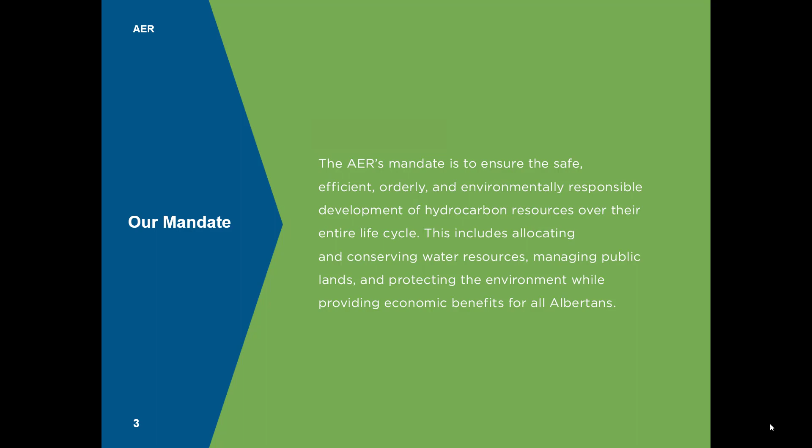The Alberta Energy Regulator is the regulator for hydrocarbon resources in Alberta. Our mandate is to ensure the safe, efficient, orderly, and environmentally responsible development of hydrocarbon resources over their entire life cycle. In Canada, methane emissions come from various industries. The largest source of emissions is the oil and gas sector, with the vast majority of activity occurring in the provinces of Alberta, Saskatchewan, and Newfoundland and Labrador. Approximately 70% of Alberta's methane emissions in 2014 were from the oil and gas sector.

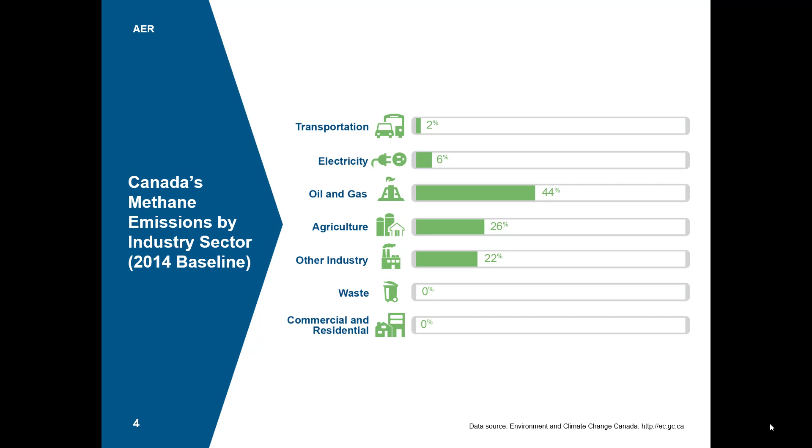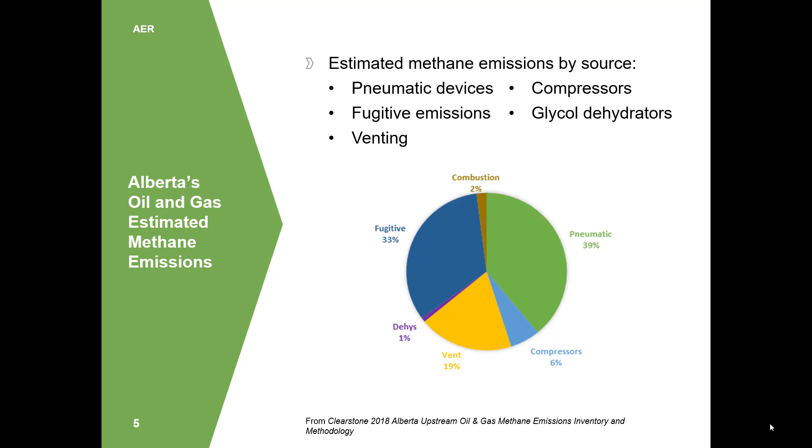Estimates indicate that the largest sources of emissions from oil and gas operations in Alberta are pneumatic devices, fugitive emissions, and general venting. Unless otherwise specified, the requirements apply to upstream oil, gas, and bitumen wells, and facilities, gas plants, pipeline installations, waste storage facilities, and tank terminals that are regulated by the AER. This includes production and injection wells, central processing facilities, fractionation, and straddle plants.

The proposed requirements do not apply to oil sands mining schemes, transmission facilities, meter stations and pipelines, or oil sands plants, including upgraders for removing bitumen from the oil sands mines, refineries, railcar loading facilities, downstream distribution facilities, and the AER-regulated facilities that are not related to oil and gas or bitumen production, such as coal water wells, brine wells, or Canadian Energy Regulator regulated facilities.

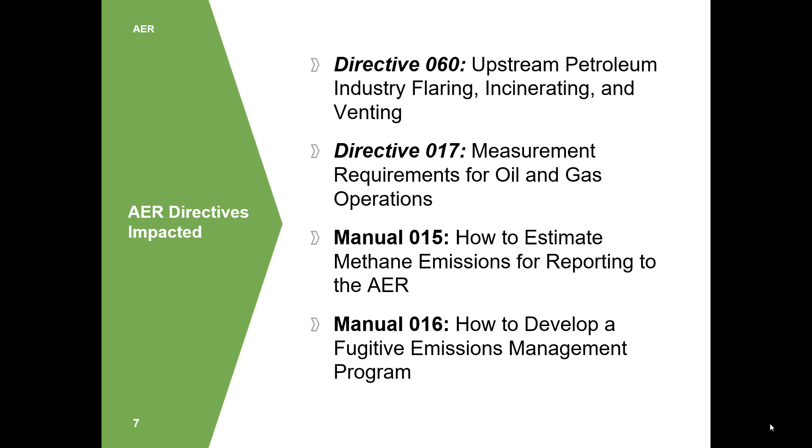These are the AER directives impacted. Directive 60, which pertains to operations, reporting, record keeping, and emissions requirements, as well as Directive 17, which pertains to measurement and reporting requirements. Two new manuals are also available: Manual 15, how to estimate methane emissions reporting to the AER, and Manual 16, how to develop a fugitive emissions management program.

Regulatory enhancements within Directive 60. The definitions of fuel and flare and vent gas have changed for reporting purposes. Most notably, gases previously defined as fuel gas have been narrowed to only include gas that is combusted, and the released energy is used in upstream oil and gas operations. Any gas sent to flare is deemed flare gas, and any uncombusted gas that vents to the atmosphere is vent gas. Flaring and incineration spacing requirements now include new spacing requirements for enclosed combustors. There is also an increase in flaring limits for small gas plants.

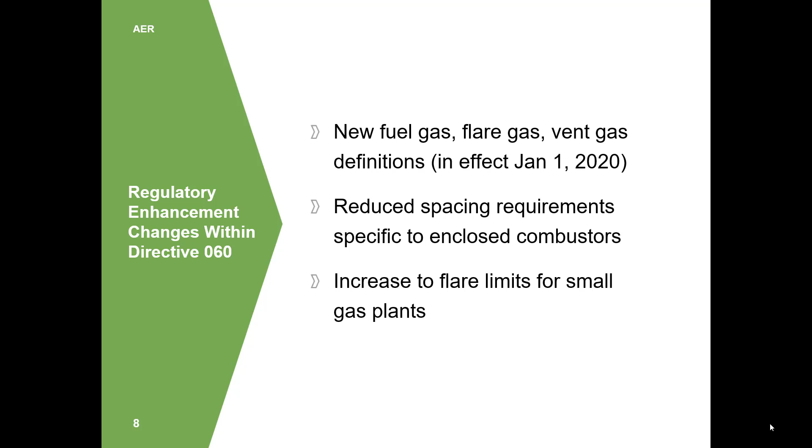This Venn diagram illustrates the layers of regulatory requirements. The requirements limit vent gas through an overall vent gas limit, a defined vent gas limit, fleet average limits, and equipment-specific vent gas limits. For example, pneumatic devices have equipment-specific requirements and are also governed by the overall vent gas limit. Additional requirements address fugitive emissions management, as well as measurement, reporting, and record keeping.

Overall vent gas refers to routine and non-routine vent gas. The duty holder must limit overall vent gas at a site to 15,000 cubic meters or 9,000 kilograms of methane per month. The cumulative vent gas from all sources at a site must not exceed the overall vent gas limit.

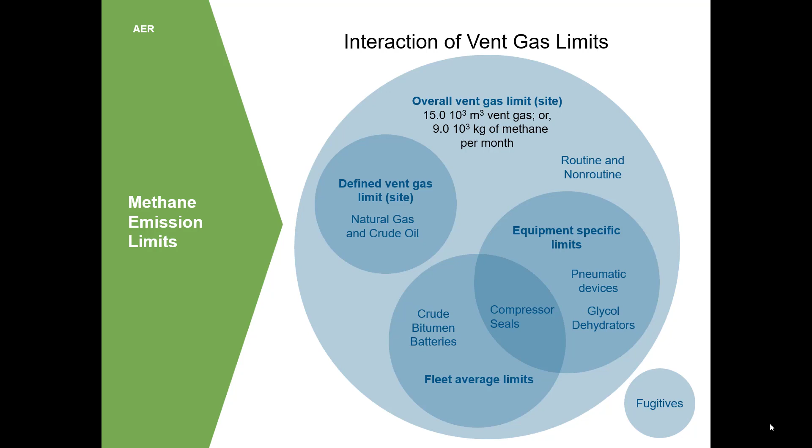In effect dates for the requirements. On January 1st, 2020, the changes to the fuel, flare, and vent gas definitions went into effect and changed how volumes are reported in Petrinex. Also new for 2020, compressor seal testing begins, methane emission records must be kept, and the first annual methane report is due. A methane reduction retrofit compliance plan, as well as a fugitive emissions management program must be in place.

In 2022, crude bitumen battery venting and compressor seals may be managed under a fleet average, and new facility and equipment requirements come into effect, as well as venting limits for existing glycol dehydrators. In 2023, existing pneumatic requirements come into effect, and the overall vent gas limit applies to all sources of vent gas at a site. Unless otherwise stated, all other requirements of Directive 60 are in effect January 1st, 2020.

The Methane Reduction Retrofit Compliance Plan. Duty holders are required to develop a Methane Reduction Retrofit Compliance Plan, or MRRCP, that outlines the actions that will be taken before 2023 to ensure that all sites will come into compliance. In the MRRCP, operators must identify the resources allocated to completing the replacements and retrofits and the schedule for the actions. An executive must approve the plan.

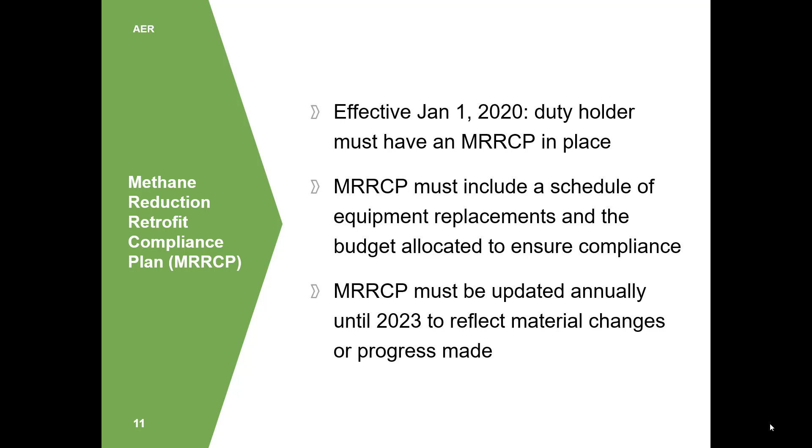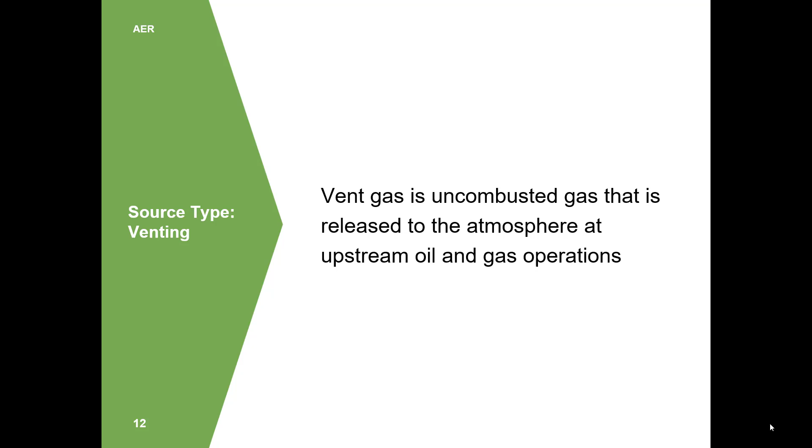Venting. Venting represents 20% of Alberta's methane emissions from the oil and gas sector. This 20% does not include emissions from pneumatic devices, compressors, or dehydrators. Vent gas is uncombusted gas that is intentionally released to the atmosphere at upstream oil and gas operations.

Vent gas limit for defined vent gas. Defined vent gas refers to vent gas emitted from routine venting, excluding vent gas from pneumatic devices, compressor seals, and glycol dehydrators. Non-routine venting is managed under the overall vent gas limit.

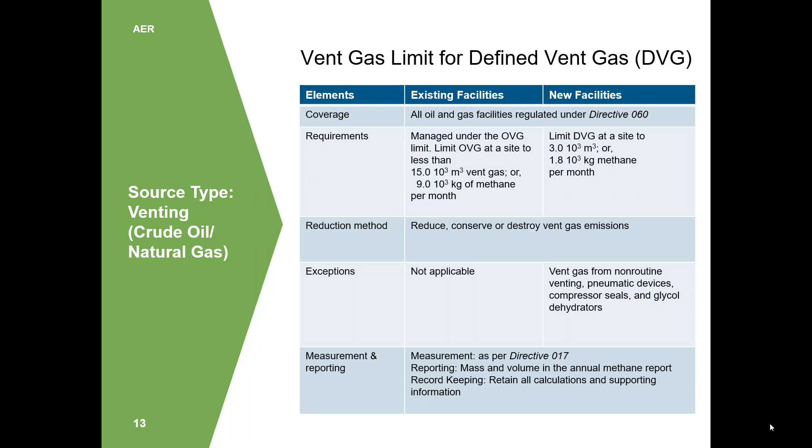The duty holder must limit defined vent gas at a site to 3,000 meters cubed per month, or 1.8 tons of methane per month, at any site with first receipt or production on or after January 1st, 2022. Operators must report the volume and mass of defined vent gas in the annual methane emissions report.

Vent gas limits for crude bitumen batteries. The duty holder must limit vent gas from crude bitumen batteries by either managing vent gas at crude bitumen batteries to meet the defined vent gas limit at each site, or adhere to a crude bitumen fleet average. The crude bitumen fleet average limit is applied each month per facility ID from all crude bitumen batteries in a duty holder's fleet, with no site to exceed the overall vent gas limit.

Thermal in situ schemes and operations are excluded from the crude bitumen fleet average. Also, batteries with either crude oil wells or crude bitumen wells inside the Peace River area, as defined in Directive 84, are excluded from the fleet average limits for crude bitumen batteries. Semi-annual gas-oil ratio, or GOR, testing is required for crude bitumen batteries managed under the fleet average.

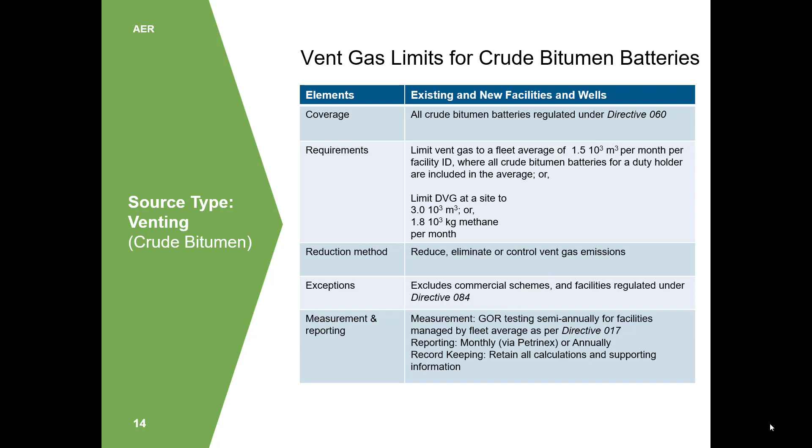Pneumatic devices. Pneumatic devices include pneumatic instruments and pumps that are the largest contributor of approximately 36% of Alberta's oil and gas methane emissions. Pneumatic instruments include devices such as controllers and transducers that use pressurized gas to maintain process conditions. Pneumatic pumps use pressurized gas to inject chemicals, usually to prevent freezing or corrosion.

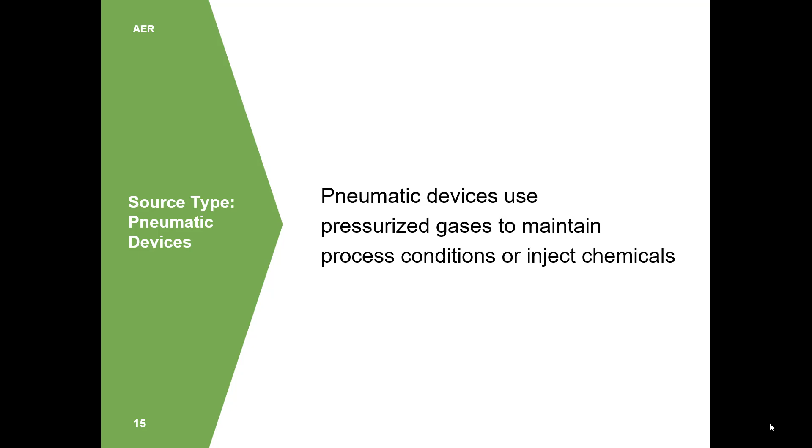Vent gas limits for pneumatic devices. Pneumatic instruments and pumps installed on or after January 1st, 2022 must control vent gas. Exceptions include instruments that are required to maintain safe operating conditions or to achieve a necessary response time, and there is no other way of accomplishing this while still meeting venting requirements. Pneumatic pumps that are operating less than 750 hours per year are also exempt from these requirements. These new devices that are permitted to vent require a weatherproof tag.

Level controllers installed before January 1st, 2022 must reduce venting by either using a relay that minimizes transient or dynamic venting, or by adjusting the actuation frequency to reduce unnecessary actuations. Instruments other than level controllers that are installed before January 1st, 2022 must be retrofit or modified so that the manufacturer specified steady state vent gas rate is less than 0.17 meters cubed per hour.

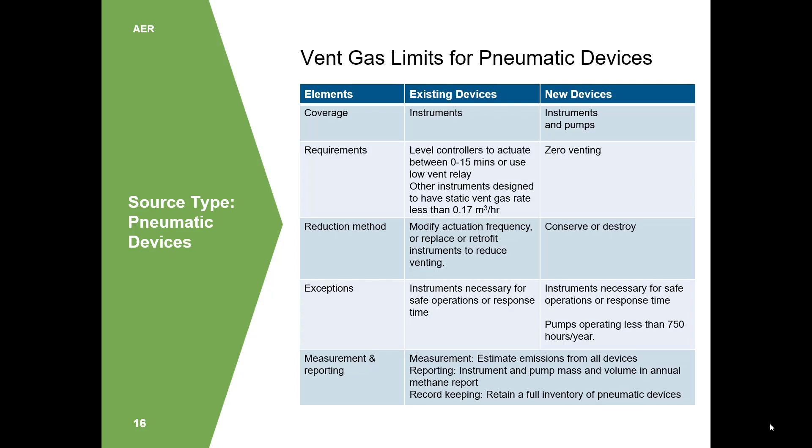Operators must report the vent volumes and mass from pneumatic instruments and pumps in the annual methane emissions report. Operators must maintain an inventory of pneumatic devices on record. Compressors. Compressors represent 8% of Alberta's methane emissions from the oil and gas sector. This 8% includes compressor seal vents, blowdowns, and engine starts.

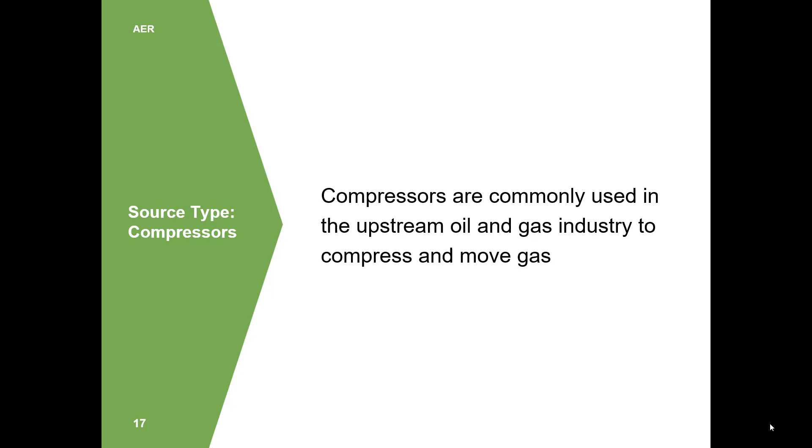Vent gas limits for compressor seals. The vent gas limits for compressor seals apply to any reciprocating and centrifugal compressor rated to 75 kilowatts or more that operates for 450 hours or more per calendar year. Compressor starts and blowdowns are exempt from this requirement and form part of the overall vent gas limit.

For reciprocating compressors, the requirements apply an annual fleet average rate limit to reciprocating compressors that are installed before January 2022. The fleet average rate limit will also apply to reciprocating compressors that are installed on or after January 1st, 2022 that have fewer than 4 throws. An upper rate limit per throw will also be applied on all reciprocating compressors subject to the fleet average limit. Duty holders must ensure their fleets meet the average rate limit by January 1st, 2022.

The duty holder must control vent gas from any reciprocating compressor with 4 or more throws installed on or after January 1st, 2022. For centrifugal compressors, duty holders are subject to a per compressor vent rate limit. If a duty holder discovers that the per compressor vent rate is found to exceed the vent rate limit, the duty holder has 90 days to bring the vent rate below the limit. For compressor seal measurements and reporting requirements, duty holders will have an annual compressor seal vent metering requirement and report the annual volume and mass by facility, as well as information specific to each compressor.

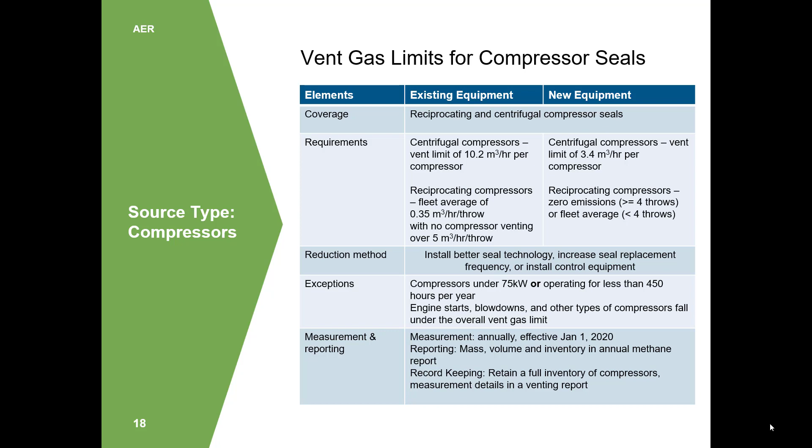Glycol dehydrators. Glycol dehydrators represent approximately 3% of Alberta's methane emissions from the oil and gas sector. This 3% includes emissions from regeneration units, flash tanks, and energy exchange pumps. Glycol dehydrators are used to remove water from gas.

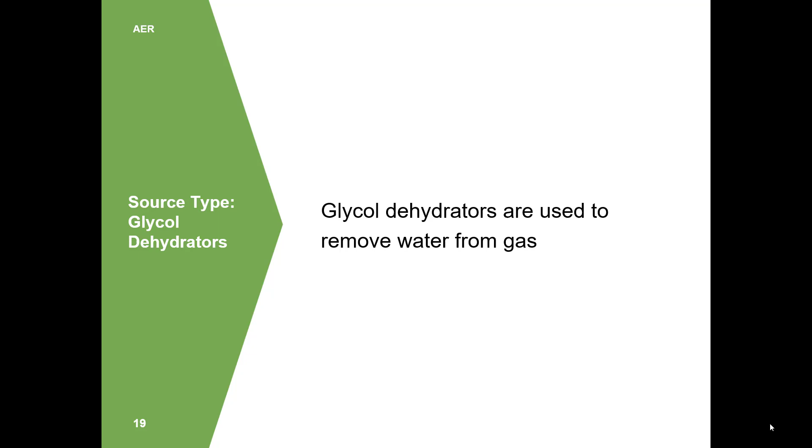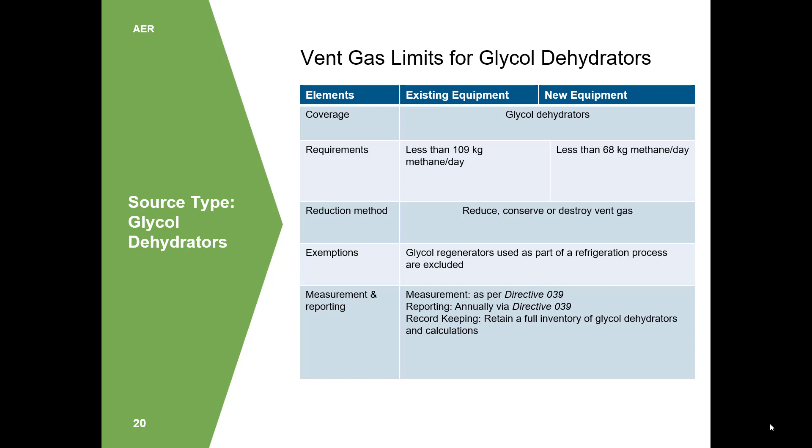The requirements apply a limit of 109 kilograms of methane per day for each dehydrator installed before January 1st, 2022, and a glycol dehydrator rate limit of 68 kilograms of methane per day for glycol dehydrators installed on or after January 1st, 2022. Please refer to Directive 39 for measurement, reporting, and inventory requirements for glycol dehydrators.

Fugitive emissions. Fugitive emissions are unintended releases of gas to the atmosphere and include emissions from worn, broken, or loose components, surface casing vent flows, gas migration, and equipment emitting in excess of design or normal operating conditions. Fugitive emissions contribute approximately 30% of the estimated 33.3 megatons of carbon dioxide equivalent associated with oil and gas operations.

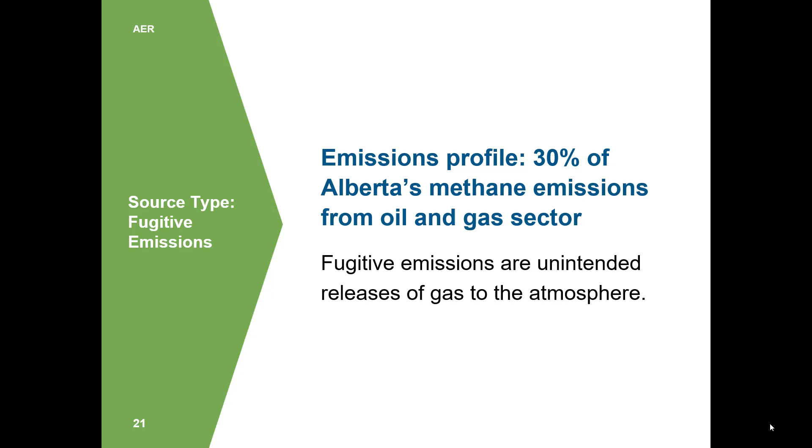Fugitive emissions management. Survey frequency and repair requirements are based on the concept of risk-based regulatory design. Not all facilities, equipment types, or fugitive emissions require the same level of effort or response. Fugitive emissions survey frequency is triannually for sweet gas plants, sweet compressor stations, and sites with controlled storage tanks.

The survey frequency is annually for sour gas plants, sour compressor stations, batteries, terminals, custom treating facilities, and injection or disposal facilities. Fugitive emission screenings are required annually at well sites. Surveys are required starting January 1st, 2020. Once a fugitive emission is identified, operators will have between 24 hours and 30 days to repair. Repair may be postponed for quantified fugitive emissions under 10,000 parts per million and fugitive emissions that require a major shutdown to repair.

Alternative detection technologies may be used to complete surveys and screenings. Justification must be provided to the AER upon request. Alternative program design proposals may be submitted to the AER for evaluation and possible approval to be used instead of the stated requirements.

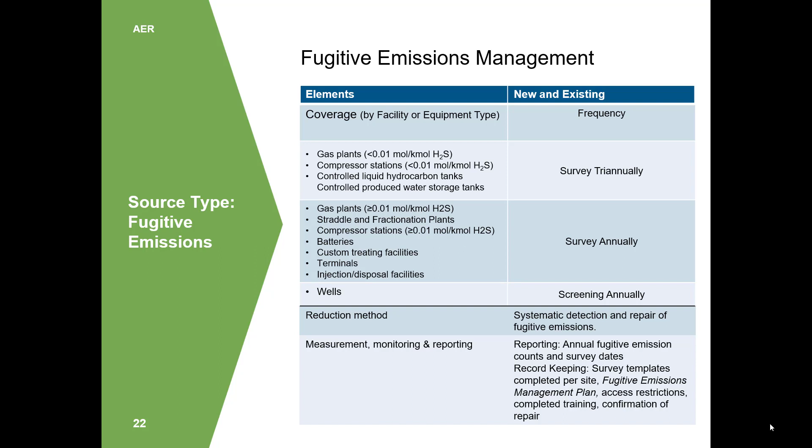Fugitive Emissions Management Program. The AER requires that each company develop a fugitive emissions management program. The mandatory elements that must be in a duty holder's fugitive emissions management program are detailed in Appendix 12 and include such things as plans to meet the requirements, procedures regarding training, data management, and continuous improvements, as well as equipment that will be used to conduct surveys. The AER encourages operators to introduce or enhance preventative maintenance practices and ongoing fugitive emissions detection measures to reduce the likelihood of fugitive emissions.

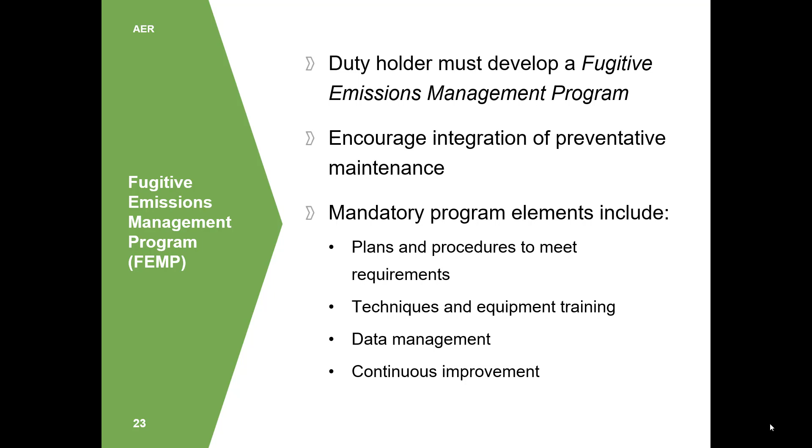Emissions reporting and compliance assurance. Methane emissions reporting. Methane emissions reporting is needed to support the outcomes of the Climate Leadership Plan. This includes tracking progress made towards the 45% reduction outcome in 2025, providing compliance assurance oversight, generating performance reports for government and all stakeholders, and conducting analysis of regulatory effectiveness.

OneStop is the tool used for reporting methane emissions. It is a secure, convenient, and integrated website that allows duty holders to interact with many different regulatory functions in one place. The annual methane emissions report includes information about the source categories previously mentioned for the calendar year. The reports are submitted through OneStop and are due the following June of the calendar year being reported.

Operators will have the choice of manually entering data for specific facilities or bulk uploading data for facilities at once. They will also be able to review and check their data prior to submission. Reporting for production accounting purposes through Petrinex is still required to be conducted on a monthly basis.

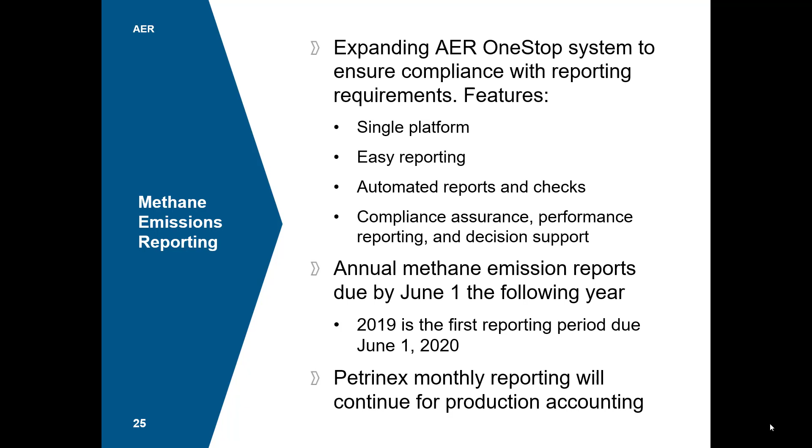Compliance assurance. The AER has a robust system for assuring compliance with regulations that is integrated with the OneStop reporting system. The AER will apply the same tools and approaches to enforcing the methane regulations as they go into force. These include educational inspections to ensure field staff are aware of the requirements, data analysis to identify potential non-compliances that aren't directly evident, and desktop audits for review of all records alongside reported data and field inspections.